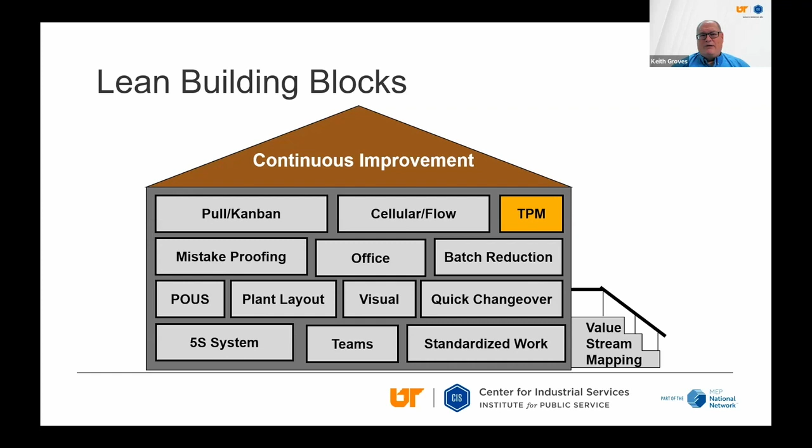So this is going to be a quick overview, trying to pull out a section of this. I just wanted you to see where TPM is, OEE falls in that TPM banner. It's just one piece of the TPM program, and we're going to talk about that today.

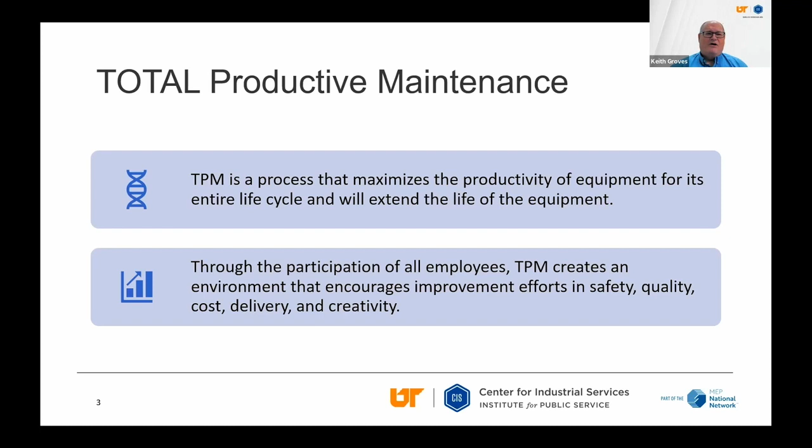And the more we can incorporate the employees, the more involvement they have, the more ownership they have, which means we have a better opportunity to observe things and identify areas for improvement as we go forward. That is really an important piece of what we're doing.

So why should I care at all about this? Well, the goals of TPM are important, and what they can do for us. As I just mentioned, it's developing people who are equipment knowledgeable. I always say at this point, we're not trying to make mechanics out of our employees. Having been in maintenance at some point in my life, I don't want operators being mechanics on machines. I do want them to be able to identify when things aren't going as they should be going. They're there more than I am or was, and they can tell you when something's not going right.

So it's important that we develop them and help them to understand more, have more knowledge about their equipment that they're using. It also helps to create a safe, quality work environment when we have equipment that's engineered properly.

I think this next point goes along with the first one. It increases enthusiasm and creativity flourishes, because we get people thinking about what they're doing in the areas they're doing it in, and it gives them ideas about how it could be better. And then we want to maximize the productivity of the equipment by measuring what OEE is all about.

That's really where the core of what we're going to talk about today is: how do we measure that? So I guess I would ask the question now, how are some of you gentlemen and ladies that are in manufacturing and in companies, how do you measure that currently? If you want to go into the chat box and answer that, that'd be fine, or if you want to speak up, that'd be great too. Any comments on that? How are you currently measuring equipment effectiveness?

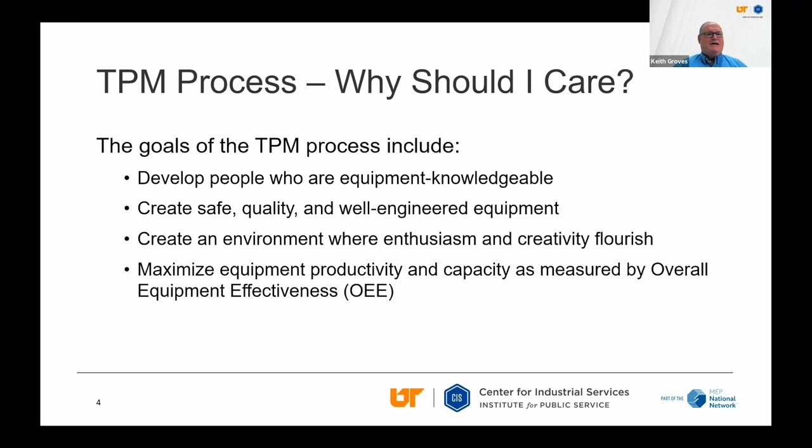Good, I think you'll find that as we go on and start talking about how to calculate this, what you just mentioned will come very much into play and will help you see a little bit bigger picture of how it all fits together. So I appreciate that very much, Chris. Thank you. Okay, so there's an importance there that we have a program in place.

The goals of that, you'll see that these are four zero goals. We want zero unplanned downtime. Downtime is not a good thing, we don't want any downtime. So we want to define what planned downtime is for maintenance. We want to eliminate breakdowns where possible, and there again it's tracking and looking at what is causing those things and trying to identify causes in how we can eliminate those things. And then creating zero defects.

So you begin to see a kind of a pattern. One, we're talking about machinery that's running, that's doing what it's supposed to do. And now we're talking about running, but creating product that's good, not defective product.

And then we have one called loss of equipment speed. This is one that operators sometimes don't realize, that machinery is designed to run at a specific speed for optimum production, and being able to monitor that to make sure that we're not running it too fast, because that could cause problems, or too slow, and that could also cause problems. I notice this point, that typically industry loses up to 10% productivity due to a loss of 10% of machine speed. So it just kind of goes hand in hand - if the machine's not running properly, then our throughput, our productivity is going to be affected.

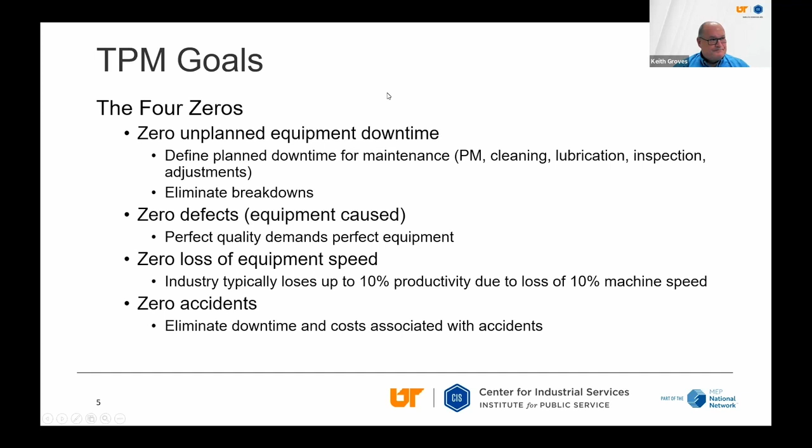This is one company that was looked at - there are probably many other things. I don't know how much time we actually spend with our operators making them aware of what these costs are. Because if you walk through plants and look at certain things, such as hydraulic oil on the floor, if there's a leak associated with that - by using an active TPM program over a 2-year period, this company recorded a reduction of 57% in oil consumption. And we don't think about water consumption, but that's a cost that's there, and some reductions there can add up to dollars that are pretty high, and people just don't realize those kinds of things.

And the other side of that, from the maintenance side, is when we have to contract maintenance, when we have specialized products that we have to have people come in and work on, or repair costs of those machines. The cost of those parts that were available is tremendously high.

So just the awareness of those kinds of things, that people can see how they affect these costs, is important. We are making it more important now that employees are aware of how they affect cost on the shop floor. The quality of the product affects the cost, the materials that go into it, the diligence with which we keep our machines clean and operating at high levels. That's a cost that's out there.

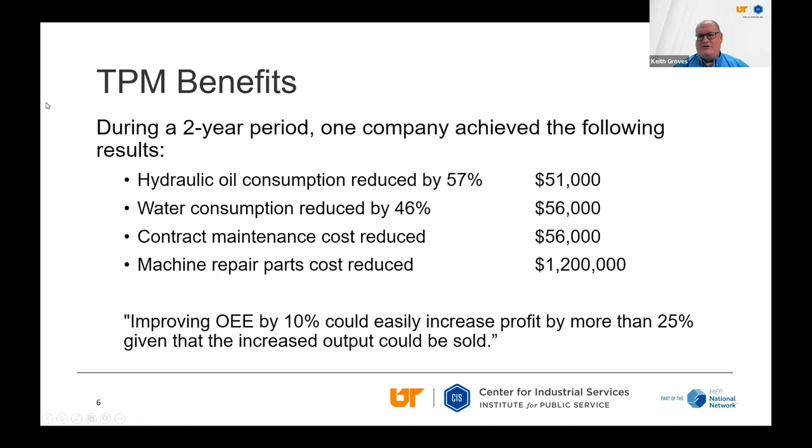Enough about why we should do it. I think that's pretty apparent. How do we do that? Well, let's start with a little story.

Let's think about your roles, and one of these may fit you. Let's think about when we have a problem with our machinery. This is called the production folklore, and we're going to start with some maintenance tales. The first one is the manager's tale.

So think about what happens when the machine goes down. The manager's response is, well, I don't have time to shut this machine down for maintenance. I've already lost so many days this week, or I'm already running behind. I can't afford that because we had a breakdown on Monday. A lot of times as managers we're having to shuffle things around, work through things. It becomes pretty chaotic at times, and we just can't seem to find time to schedule machinery to go down for maintenance. That's a tough one to swallow, because we know things are going to happen.

So think about how machine failure impacts the production manager's work life. They're not always in the best mood when it goes down, and we work in a reactionary mode, sometimes called firefighting, because that's what we have to do. They just go from one fire to the next if we don't have control of our processes. Their life becomes very difficult as a manager because they're kind of in between. We've got to have production, but yet I've got to deal with these issues on the machine. So it becomes a little bit chaotic, and we have to be aware of that.

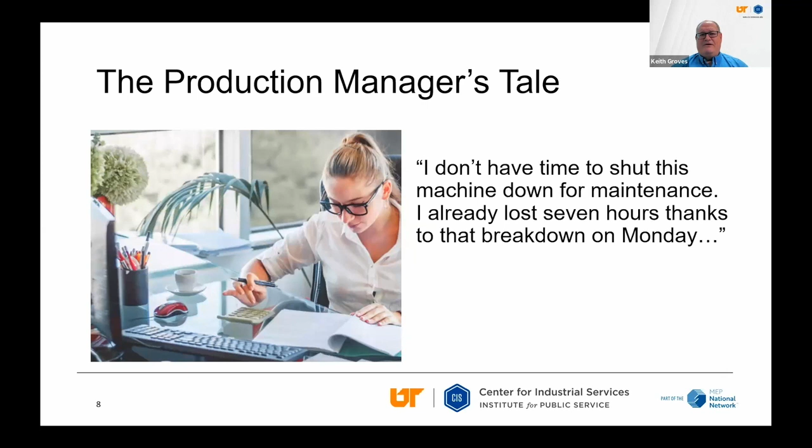Then the next one in our tale of production is the maintenance manager. So what is the maintenance manager's role when this happens? Well, he's kind of like Superman. He's here to save the day. He's coming in, he's going to swoop in and make everything better, right? Well, that's the theory, and that doesn't always happen that way.

They come in and they've got to do some very important pieces of this. They've got to first determine what happened, diagnose the problem, decide what kind of parts are going to be needed to fix it, and find those parts. That becomes a problem sometimes. Getting the people lined up to work on it also becomes a problem sometimes. It just takes a lot of extra time just to get ready to make that repair. You may have experienced something like that as a maintenance manager, or seen what your maintenance department does. They've got a lot of responsibility.

And there's a big burden there to figure out what's priority, what comes first, and how do we deal with that. So the maintenance managers have a big issue to deal with.

Then you get into the production scheduler, the guy that's probably, in my opinion, has the toughest job in the whole plant, because they have to schedule for the production and the plan. They spend a lot of time putting a plan together over the weekend, and end of the week come Monday morning they put it out, there it is, and by noon of Monday that program is shot. Nothing worked out, it didn't pan out, or we had a machine go down, so everything changes. Now they have to go back to work to try to recover the rest of the week and then try to move ahead.

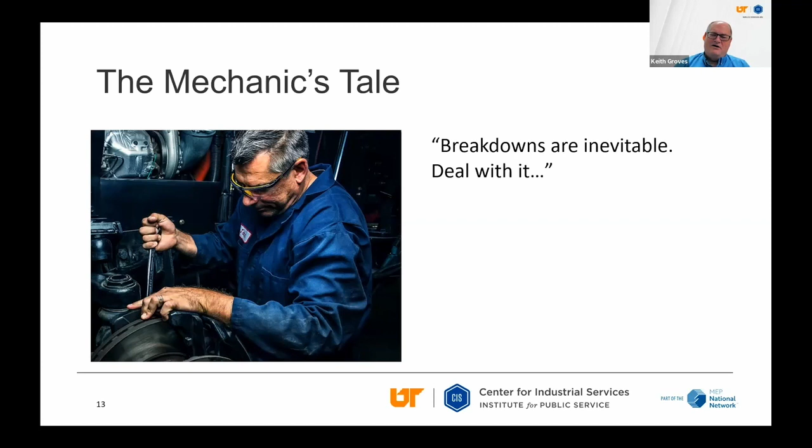So the mechanic is kind of the next guy in the tale, because he knows breakdowns are going to be inevitable, and he's kind of grown accustomed to just dealing with things. But there are so many of them that can go around, and we get very stressed out and very slim on availability of time, and the things they have to work with, such as having the parts available, having the help to do some of those things. It gets to be a very cumbersome job sometimes. Not always a fun thing to do when you have breakdowns and you're trying to get there, because everybody wants you to have a magic wand or something, just wave it over and fix it, and that doesn't happen.

There's a lot of things that have to come into place. So the moral of the story is, if you don't schedule time on your equipment for planned maintenance, it will schedule itself. It will go down. There's a life cycle within that equipment that's going to go down. It's our ability, it's our job to try to figure out when those might be, to be proactive rather than reactive.

And that's really what helps us to understand a little bit better about what's going on and how we do that. All right, so let's look at a few things here and start talking about how we do this.

We're talking really about reliability maintenance. And that's really what we want to do, is we want to be able to do things that help keep our machines reliable, doing what we need them to do. We're going to focus on...

This kind of relates back to the continuous improvement definition, but it's a systematic approach to eliminate losses once planned and autonomous maintenance are initiated, and new equipment purchases and designs are based on minimizing total equipment life costs. Focused improvements play a vital role in increasing equipment performance. And then focused improvement events or projects are chartered, driven by collected data to identify specific opportunities.

So that's kind of what the outcome of this is, as I said a minute ago, becoming more proactive rather than reactive. These improvements are typically team-based. We want to get people aimed at reducing those 6 major losses that take place, and we're going to talk about those here in just a second in machinery.

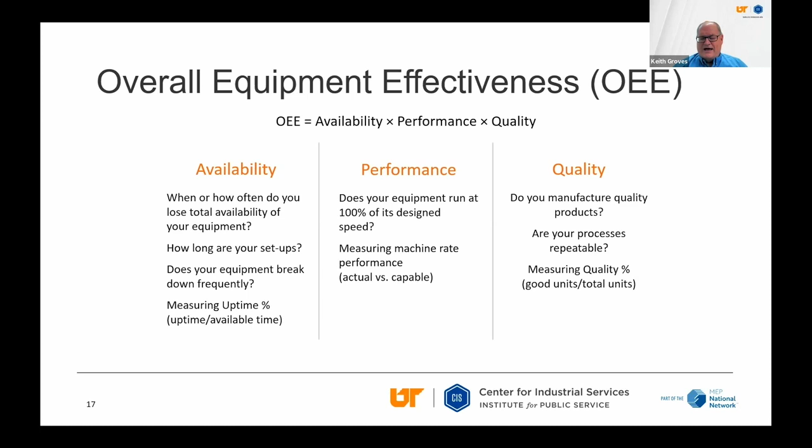So we want to look at how to do that. Now we're going to talk about some basic ways to get those things, but let's think about some definitions here first. We're talking about available time. This is one thing that I think sometimes we don't emphasize enough, because available time is the total shift time less the planned downtime.

And by planned downtime, we're talking specifically about lunches and breaks and cleanups, those kinds of things. Maybe it's team meetings that we have every day that we know are scheduled. Those are good things, and some of those are necessary things, but it does take away from our available time that we have during the day. If we say our shift is 8 to 5, we don't have that full 8 to 5 time available. It's less those planned times that we are down. So we need to understand that.

And then we have downtime. We have things that happen. We have changeovers, breakdowns, unplanned downtime, anything that can stop that machine. Maybe it's a machine malfunction or whatever. Maybe it's a material flow that stops it, but that's downtime. Cycle time is the total time from the beginning to the end of the process, from the time we started to the time we ended, and we usually use exit cycles to determine the rate at which those things are coming off.

And we can plot those, and we can do a lot of things with the graphs to show us how consistent we are in producing product, but cycle time becomes an important factor, and we'll see that in just a moment. And then operating time is the time the machine was actually operating, not including downtime. So those are the kind of things we're looking at, just to get some ideas of how they're going to be used in upcoming calculations.

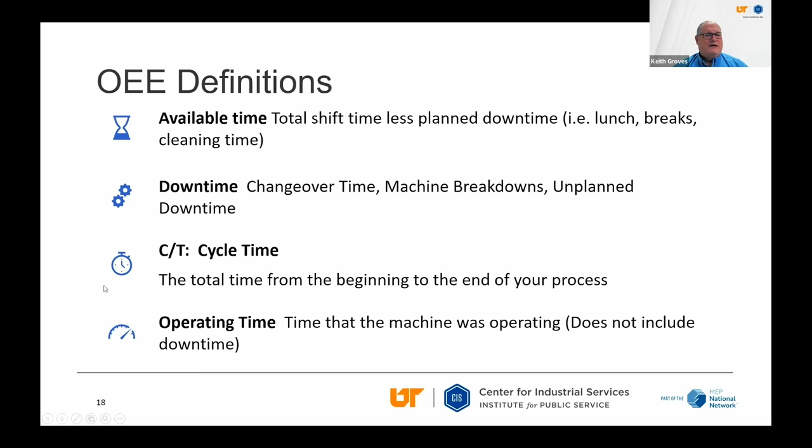We talked a minute ago about the six specific losses in manufacturing or equipment. One of those is equipment failures. That affects availability. We have setups and adjustments when we have changeovers.

Looking at our changeovers in detail tells us where we're spending most of our time. If we're spending most of our time in setups and adjustments, which is usually the case, then there's some improvement work that needs to be done there. But we can simply track that time, and that again all goes to the availability that we have. It's unplanned downtime. Then we have idling and minor stoppages. That's a pretty broad term, but it all goes to the performance of the product, of the machinery.

And then you have reduced speeds that factor into that. The next one is process defects, which goes to the quality of the product and the quality of products produced, which also leads to reduced yield. So those are the 6 major areas of loss.

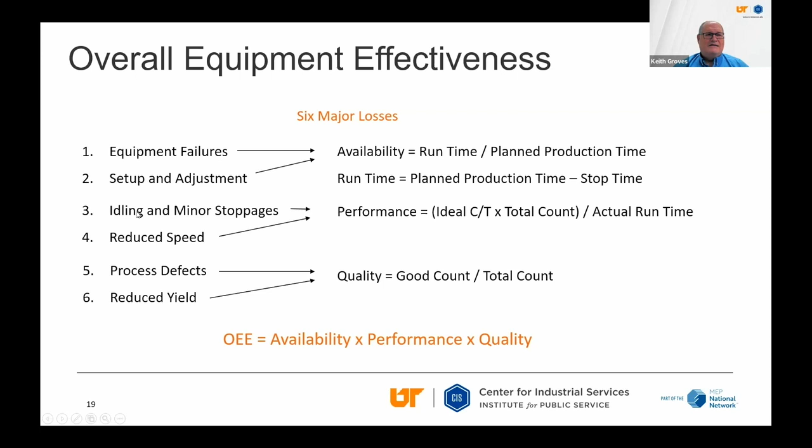Those are major categories. Now, one of the things I would suggest as you go forward is decide in advance what those things are that you want to measure as far as downtime losses. We're going to talk about that a little more in detail as we go forward. But the team together needs to formulate ideas that will help everybody be aware of what it is they want to track.

So there are some steps involved in the OEE data collection. One of them is we've got to understand what data we want to collect and how we're going to collect it best. Who's going to do it? Where's it going to be done at? How are we going to record that?

Once we get that, we're going to prioritize the improvements that need to be made based off the data we gathered. Then we're going to dig a little deeper as we identify what those defects are, or those problems are, and find out and get down to root cause. Root cause is that ultimate level of definition that says I can start and stop this problem, I can see how this problem got created and what caused it to happen. Then I can put things in place that would prevent that from happening.

And then we develop an overall improvement plan. How are we going to maintain this program? And sometimes this is the part of the steps that we don't continue - we don't finish up, we don't have that plan in place. Formalizing that and making everybody aware of their involvement in that plan leads to the sustainability of that in the long term.

We are doing a lot of programs right now within the Center for Industrial Services, helping people understand how important coaching is and how to direct teams in moving towards those implementable programs that help sustain productivity over the long term. That's an important piece of that, but sometimes it gets pushed back to the wayside a little bit. We don't get to that point. We're still focused on these losses that we have, rather than putting in a plan for improvement and how we sustain that over the long term. So those are the things we're really going to focus on as we move forward.

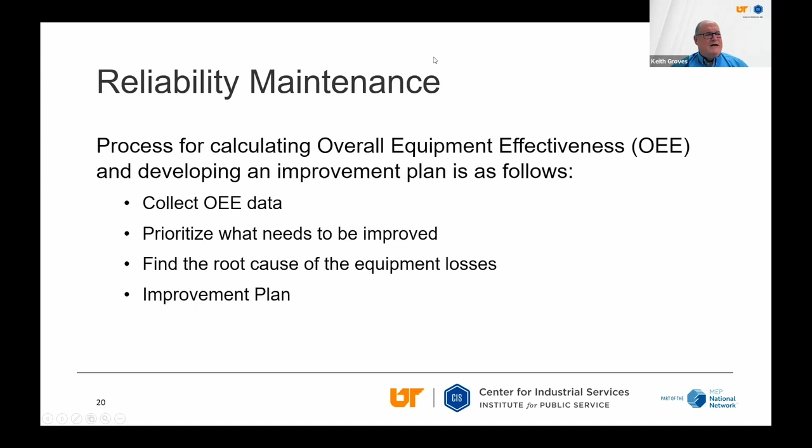The third step is to prioritize those improvements. What do we need to do first? What's going to impact it the greatest? And then we can continue to knock down those lists of improvements that need to be there.

Determining root cause, why things fail. Sometimes it's components within the machinery that fail. I learned this the hard way one time. We had packaging machines with so many cycles every day, and we found out that some of the micro switches running the information only had a life expectancy of about half of what we were running every day. So we had a lot of failure there. So really understanding your equipment.

We don't want the operators doing that - okay, we want that, but we want to gain that information because we want to capture it so that we can diagnose things quicker by understanding what has happened in the past. And that's when we find some of those root causes of things. How are we going to fix that? We've got to put a plan together for the implementation to keep that improvement process going.

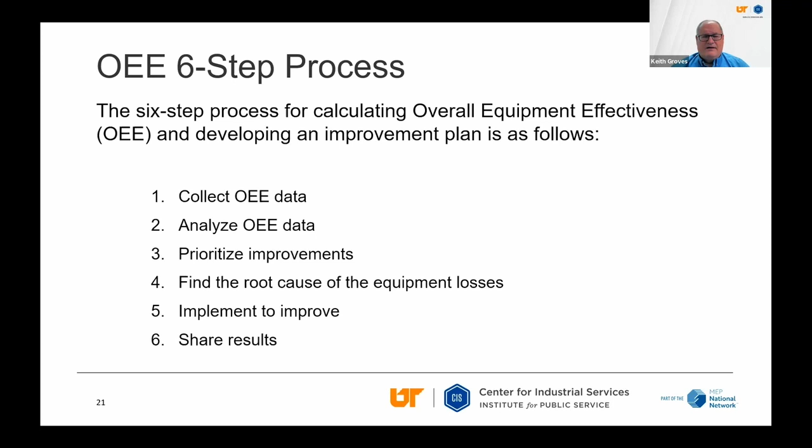And then we want to share results. We want people to see what was done, how we did it, and how we can show the benefit of going through a program like this. It's an important piece for us - if we can improve capacity, improve productivity, then we've made some tremendous steps in the process.

So let's look at some detail behind each of these real quickly. I don't know what kind of format you use or what you're using currently to collect data for your area.

I call this an hour by hour board. There may be something similar that you use, but basically this is the production run for the day. You see the hours here, each hour, 7 to 8, 8 to 9, 9 to 10. Notice they've got some breaks in here, a 10-minute break here, and there's a lunch break here, plus some other breaks.

Here's the production, here's the production goal. So this is how many we produced in this hour, how many pieces did we produce versus the goal. Did we have any scrap that occurred during that time period? If there was downtime, how long was it, and if possible, what was the cause of the downtime?

This is something the operators keep up with. They're beginning to take ownership by doing this because they're watching and monitoring the process. You do that through the whole day and come up with that data.

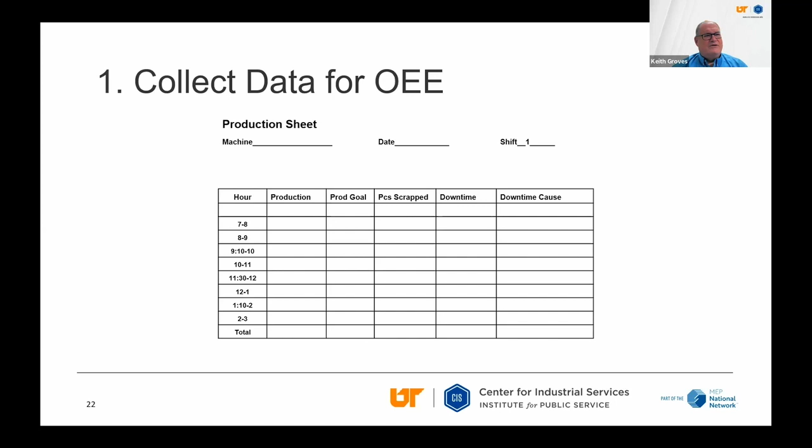At the end of the day you come up with a data sheet that looks like this. We had a total of 535 pieces produced. Our goal was 716. Well, we know that's a problem already. We had 20 pieces of scrap and we had 70 minutes of downtime.

That's 70 minutes of lost production, that's 1 hour every day. If we lose that every day, that's a problem. If we lose that over 3 shifts, that's a bigger problem. We need to understand how important these little pieces are. It may not sound like a whole lot right now, but when we start putting it into the formula, you can see what the effect's going to be.

So this is just one way of gathering information. We'll be glad to come by and visit with you or share this stuff with you if you got questions about it, or would like to see some examples in further detail. Just let us know as we complete this a little bit later.

So what does this sheet do for us? We're talking about availability. We're going to take our runtime, which is our planned production time, 430 minutes, less our scheduled downtime. We had some planned time that was down for a total of 70. Our availability is .837, so if you multiply that by 100, that's 83.7%.

The performance rate for this particular run with this data: the ideal cycle time was 36, times the total count, which was 535. We can go back one here and you can kind of see where these numbers come from. So here's our total production here.

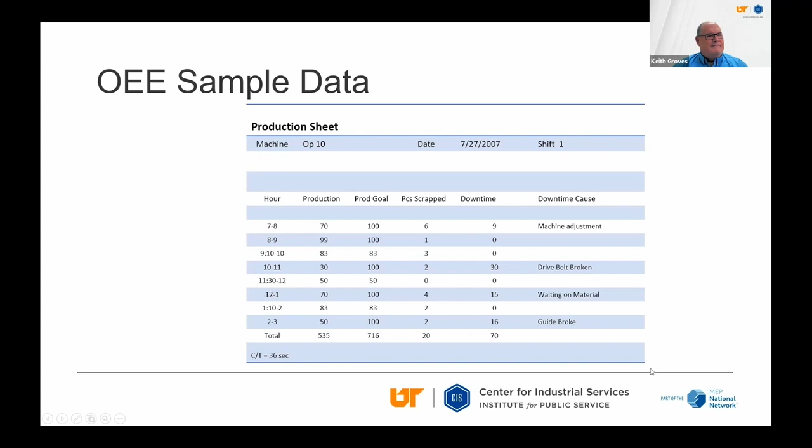Then the quality count: we took the good count less the scrap, divided by the total count, which says we're at 96.3%. This just gives us a snapshot in detail of what our day looked like.

So if you ask an operator, well, how'd you do today? Went pretty well. Well, what does that mean? I heard a guy say this one time, and please don't take this the wrong way: in God we trust, everybody else has to bring data.

So what we want to do is bring the data. This is what we did, this is how it really looks. And so this begins to look at, if you think about it from the big picture standpoint, our OEE.

We typically take each of these categories and multiply them together. So 0.837 times 0.892 times 0.963, times 100, gives us a percentage. It says our OEE is 71.9%, and our lost capacity is 28.1%.

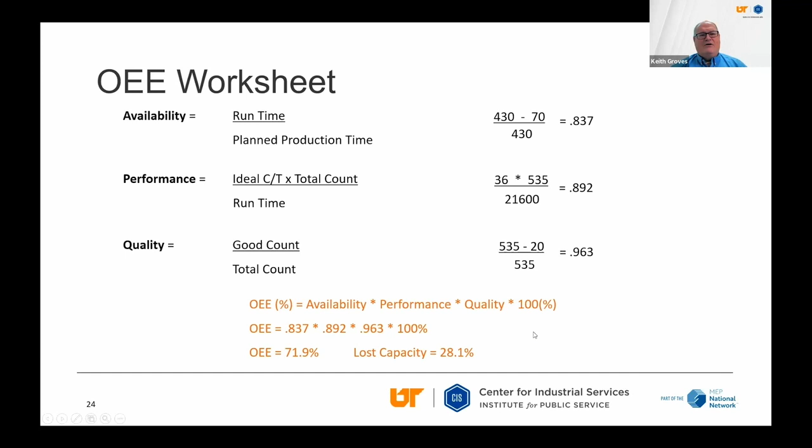Now I understand what kind of day you had. I understand we lost a little over a quarter of our product capacity today, and that's not a good thing. But this simply paints the picture for opportunities that we can look forward to and try to find out what went wrong.

So once we do that, we start analyzing what the data was. You can create all kinds of charts—Pareto charts, histograms, pie charts—whatever detail works for you, but some way to highlight what those things were.

A minute ago, I said it's a good idea for you to get your team together and determine the types of loss categories you want to track. In this case, they looked at setups and adjustments, quality, startup times, speed loss, idling and minor stoppages, and breakdowns.

Let's just pick this one out: startup. I use this when we start talking about available time. Think about opportunities at the beginning of the shift and at the end of the shift. If we start up at 6 o'clock every morning, when's the first part coming off the line?

It's like, well, we got to get the machine warmed up, we got to do this, we got to do that. Well, that's lost time that we don't think about. What are the opportunities? What could we do to make that better? How could we start that machine up on time and run as quickly as we possibly can? That's the opportunity we want to challenge them with—how do we do that?

But until you plot it out and start looking at it and comparing, you can begin to draw conclusions as to what really is causing the biggest issues you're having. In this case, it looks like idling and minor stoppages might be an issue.

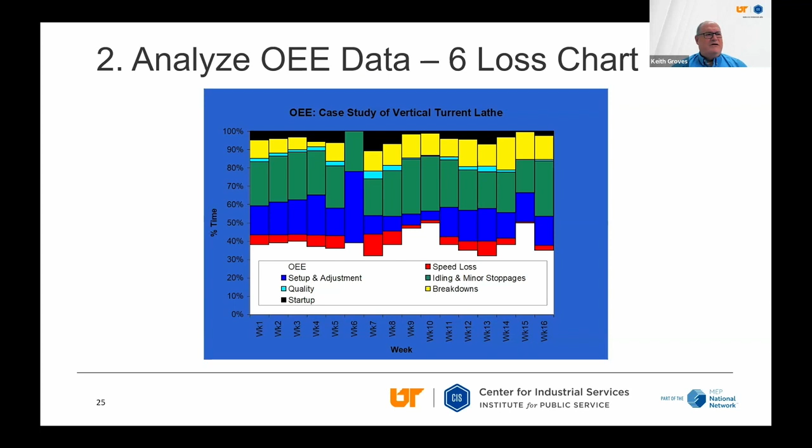And so we're going to start identifying and narrowing down, going into detail about what these idling and minor stoppage things are that are happening. Once we've done all that, we can make it real visual.

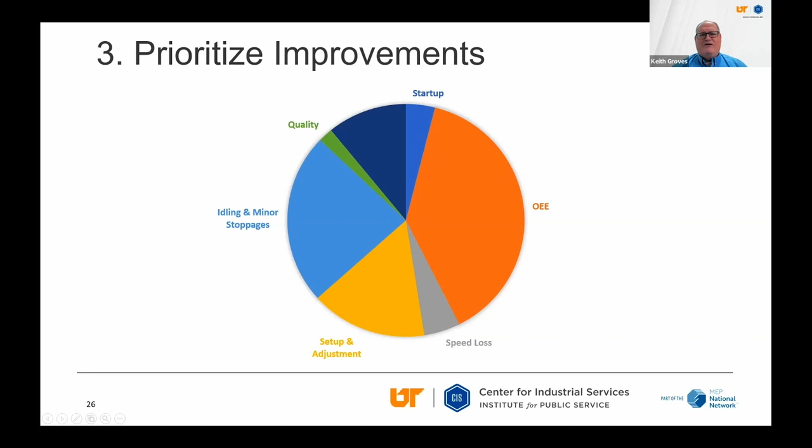Trying to figure out how do we eliminate jams. How are we going to focus on that? In the coaching process we use, we only want to work on one item at a time. In Deming's PDCA cycles of learning, you target one condition you want to identify, and you work through that until you resolve the issue and make sure it's corrected, then you go to the next one.

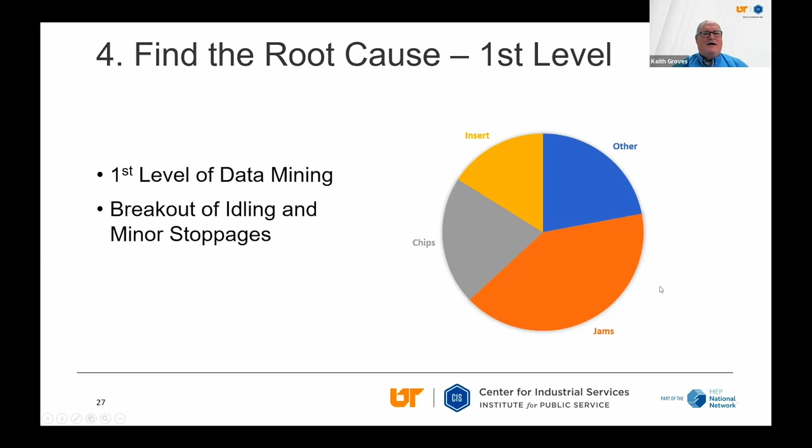So you've got a deliberate activity just focusing on how do we improve that. Once that one's done, we can see what the effect of that was on the process, and then you can go to work on some of the other ones that are there. This creates a very deliberate process for you to go through, narrowing and driving down to each of the different categories.

Once we do that, then we're going to find root cause. What caused it? Can we correct it? Can we put some temporary things in place to fix that, to see if it affects it or not? This is where the cycles of learning come in—we try some things one at a time so we'll know the effect of each one. But we're narrowing it down to the root cause and finding out what we can do to put in place permanently to make that problem go away.

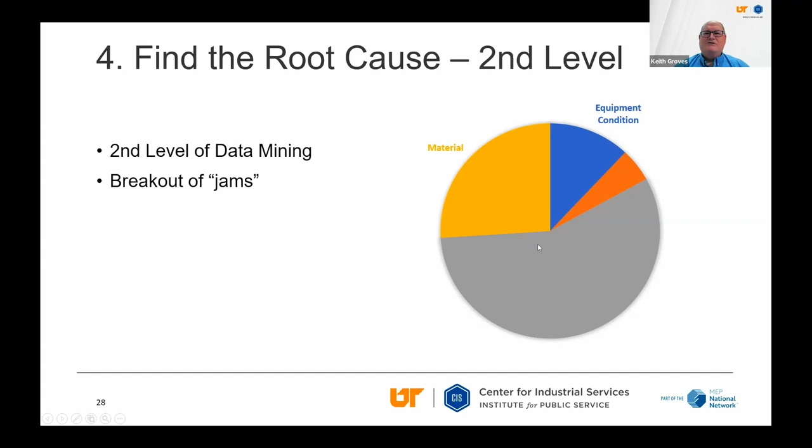Sometimes it's an operator issue. If you go back to the previous slide, you'll see that as they dug down into that, they found a big portion was operator knowledge. This is operator knowledge - there's some training issues that might be there that we need to identify and work through. So we're going to eliminate jams by educating the operator on proper procedures for loading.

This talks about interrupting the flow of the equipment and keeping us from being efficient. So we're going to look at our training program, the documents that go around it. Sometimes the training wasn't sufficient - think about it. We're guilty sometimes of getting bodies in there and we don't spend a lot of time training them. So sometimes we create our own opportunities there.

So we have questions about it. We're going to list a summary of steps, detail what the problem is, and then look at the improvements that we can do and how we're going to move that forward.

So we're going to do audits to evaluate the current methods and continue that for 2 more months to track the data to make sure we've made improvement. So we create a plan to move forward, and we define that with the team so everybody knows what's going on, where we're going, and how we're going to get about that.

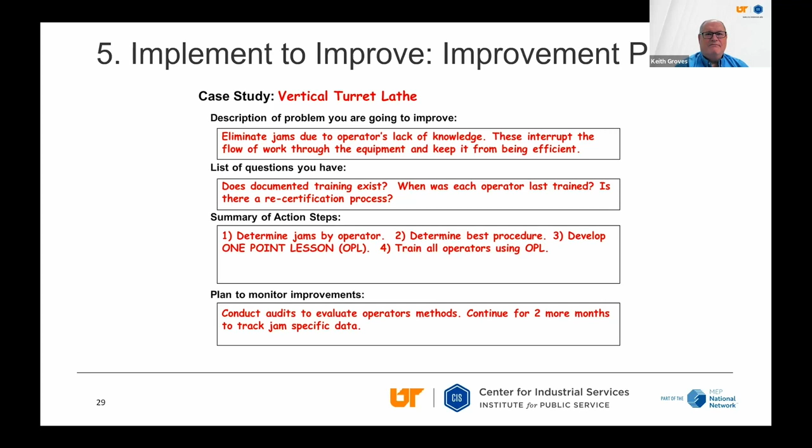We want to use this opportunity to show what we've done and how we've gone about the improvements. And by doing that, we're sharing results.

These 1-point lessons - I don't know how many of you do 1-point lessons. We encourage companies to use these. They're quick little synopses of what the problems and improvements were. This one happens to be about a motor cooling fan accessibility. It was inside of a cabinet, and we couldn't get to it to keep the airflow going.

You notice they show the current condition when it's really dirty and messy and it's not doing what it should - you see all the buildup around these fan guards and things in there. Go in and clean it up really good. They came up with a solution of pulling a piece of hose outside and putting a filter on it. I've seen companies, and we've encouraged companies sometimes, to use an exterior filter material on the outside of a machine to catch the dirt as it goes in.

So the operator could do that. That becomes an operator maintenance thing. But these little 1-point lessons are important to demonstrate what the team came up with.

Thinking about this, when we go into the full-blown TPM program, we talk about these kinds of things, these 1-point lessons. I don't know if you've ever noticed, but if you've ever gotten a McDonald's sack and looked on the bottom, there's a diagram that shows the operator how to stack stuff in that sack - where the hamburger goes, where the French fries go, where if you've got multiple sandwiches, it just tells you how to fill the bag up.

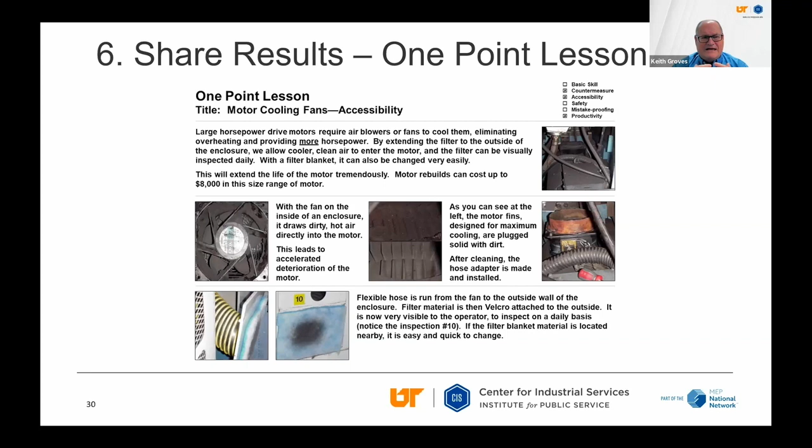I had another comment here sometime back that said we use older reliability centered program metrics for the equipment, but are transitioning to OEE. I think that's an important comment too, because this process and this way of relating that information is much more acceptable to the operators. They can understand it a little bit easier because they're there all the time. They understand those pieces because if they're tracking that information, they own that information. It's easier for them to understand how it fits into the picture.

All right, so that's kind of where we are. This program can be, if you do the full-blown TPM program, as big a project as you want it to be. But typically this is incorporated in that, and we'd be glad to discuss in more detail how we can help, how we can participate in that with you.

At this point I would just entertain any questions, any further comments you might have about the program, about what we've talked about today. Hey Keith, from the chat, we have a question: what is a typical or average OEE of a company just starting out, and what is considered world class?

Well, you typically think of, when you're calculating productivity cycles and things like that, anything over 85% is kind of an acceptable range. The closer you get up to 100%, or 90, 95%, I think that's the objective. When you get up above 90%, those increments come really slowly.

But I always look at it from what gives us the biggest bang. That's usually throughput—how much throughput can we get out of utilizing our time. If we're losing productivity because of things occurring upstream, then we need to fix those things. It may not just be the machine causing the problem, it may be something upstream. So I'd say 85 to 90% in all those areas is probably pretty typical. When you get above 90, 90 to 95, you're getting up into the world-class range. Very nice, very nice.